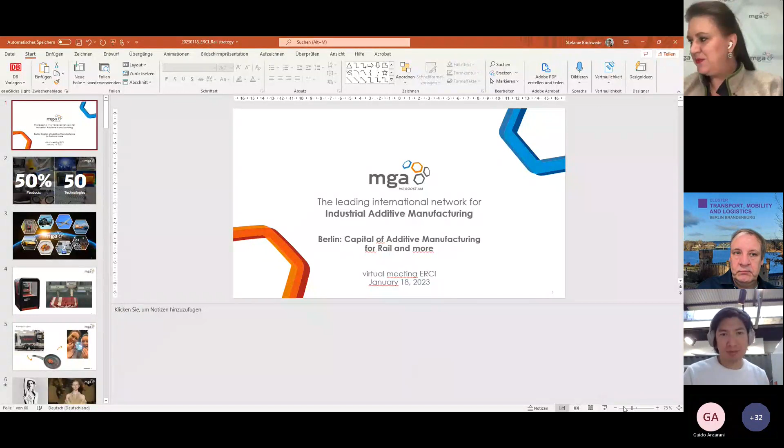Thank you so much, Lutz. Let me share my presentation. I'm really happy to be with you today because I think the potential of 3D printing in the railway sector is enormous. And I can say so because at Deutsche Bahn, we initiated our corporate project 7 years ago, and you will learn later how many parts we've already printed.

If you take a closer look at additive manufacturing, which is the expert expression for 3D printing, you will find out that by the year 2040, experts say that 50% of all parts worldwide will be printable. Anything you can think of, 50% of that will be printable. And already today, we have more than 50 different technologies in additive manufacturing, so this is not just one 3D printing technology, there are enormous amounts.

If you want to know which sectors already use additive manufacturing, you will find out that very soon, about 30 years ago, when this technology was established, the aviation industry started with additive manufacturing. Because after you've designed a digital twin, you can print out parts in a layer-by-layer structure—you add one layer after the other, which is why the whole technology is called additive technology. With that technology, you can produce totally differently compared to former technologies, and you can save a lot of weight, which is really interesting for aviation and aerospace.

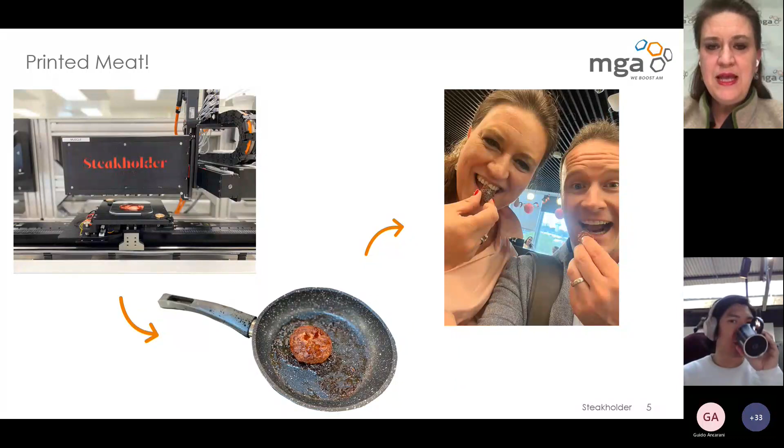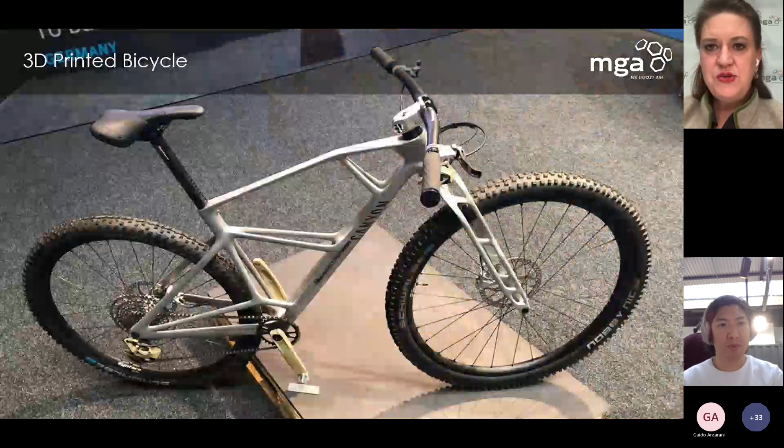In the fashion industries, AM is used with totally different designs. And also in the bike industry. And what you can also see here is that the design is different. So you can put material there where you really need this for reasons of strength, and the other parts you can just let away.

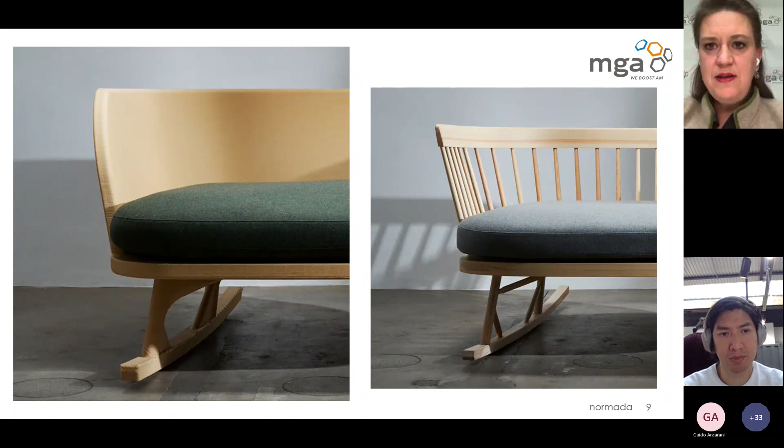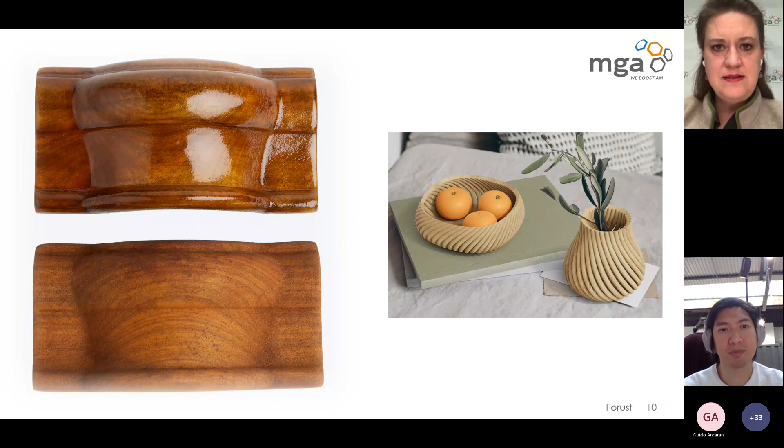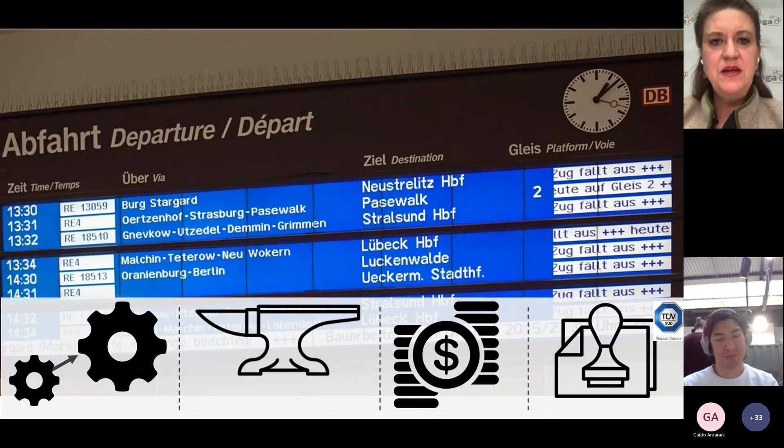Now we are coming to the sector where it's a lot of fun to work for: the rail industry. What is the rail industry using additive manufacturing for? In the rail industry, we need big parts. We need very strong parts. We have to save money with that. And of course, we have to fulfill a very high level of certification.

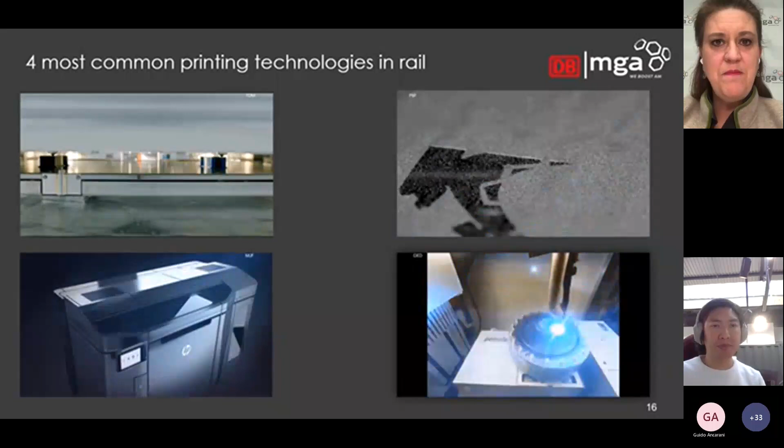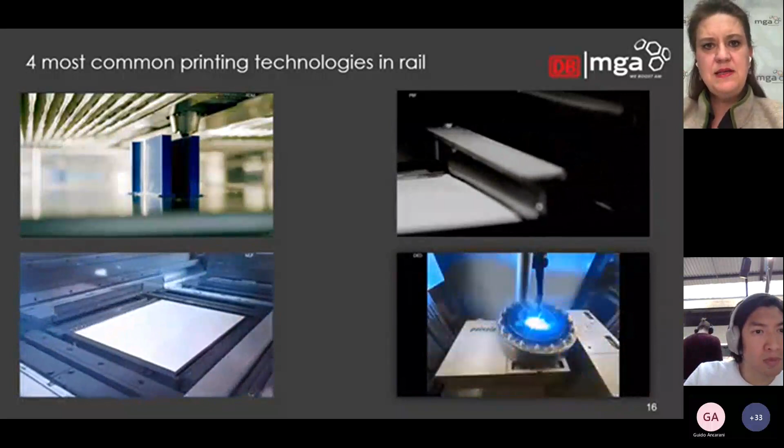If you ask me what are the main technologies we use in the rail industries, those you can see here. Starting with the upper left, that's the FDM technology, which is quite common, and I'm quite sure that all of you have seen that already. With that technology, you can use pellets or a plastic cable, and with the hot printer head, that material is heated up and in a layer by layer logic laid down on the build plate.

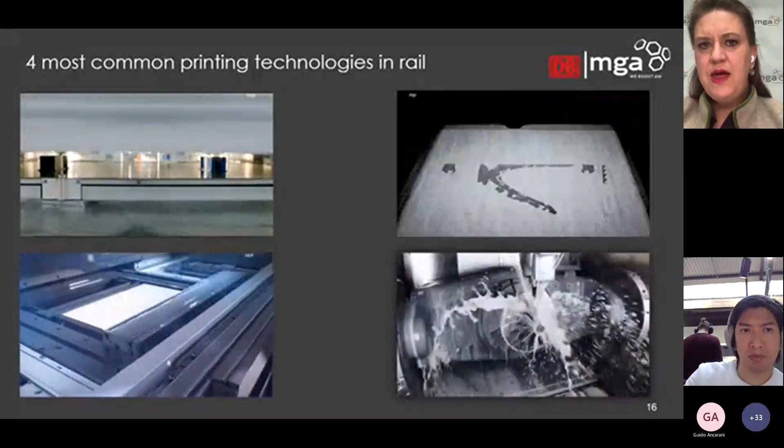On the upper right, you can see a powder bed logic, and this powder is very thin and it's melted with lasers. Those materials can be polymers or plastic in general, and it can also be metal. You produce a very strong part with that, but it takes a bit longer and therefore it's not very cheap.

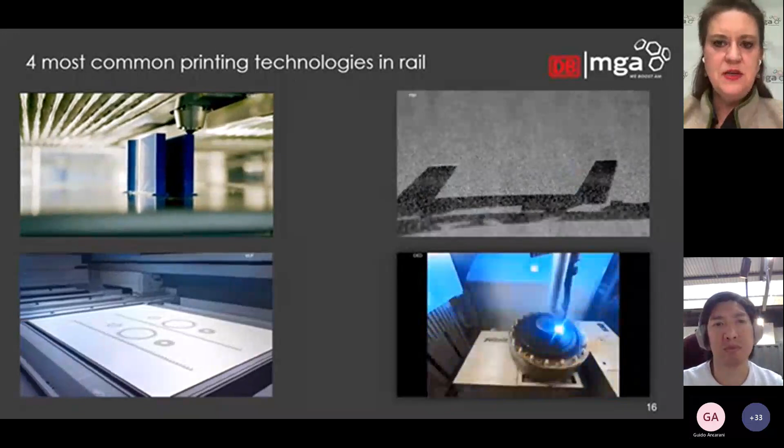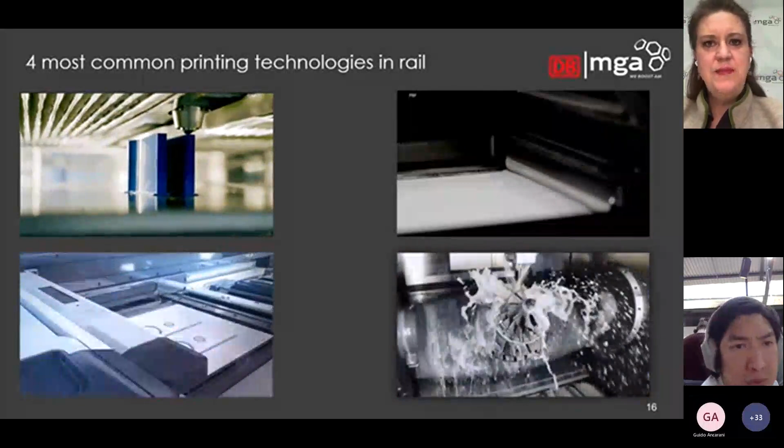On the bottom left, you can see a technology which was invented by HP, coming from the 2D printing logic. And there they use plastic, also with a high average of metal in that material. With that technology, you can produce either plastic parts or metal parts.

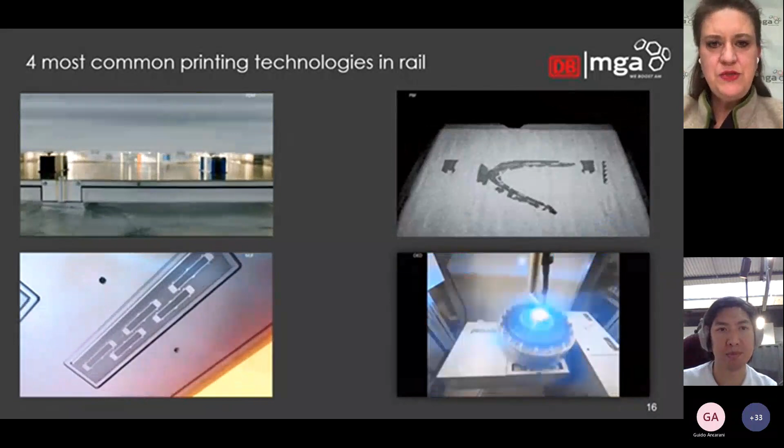And since we are in the rail sector, we need huge, big metal parts. The powder bed logic would be too expensive, and therefore another technology was invented, called wire arc additive manufacturing, where you have a metal cable that is melted by an electric arc.

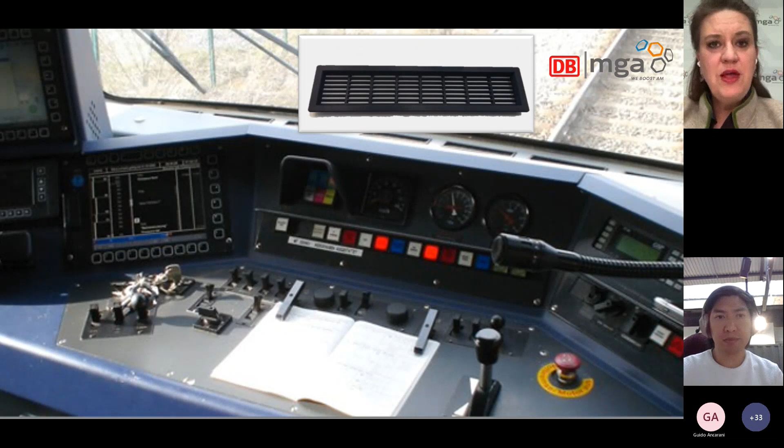What you can produce with those gorgeous technologies are spare parts. What you can see here is a little spare part belonging to the climate system of a train. Sometimes you can't get your hands on those parts anymore due to obsolescence, so meanwhile we print this at Deutsche Bahn. For that, we need FDM, the first presented technology, fused deposition modeling. With that technology, you can even produce parts with a very high level of flame retardancy.

Last year at Deutsche Bahn, we also discovered additive manufacturing for tooling. It's a bit funny because usually other companies start with tooling because those are low-hanging fruits and much easier if you take certification into account. But we discovered this last year, and what you can do are also quite big parts.

If you have to bring your trains in for a big overhaul every 6 years approximately, then you also have to color them again. Therefore, you have to put tape on these lights, and that takes a long time, and you produce a lot of waste afterwards. So what we've done is we've printed something which you can just put on these lights, spray around, take it off again, and use it at the other lights. Quite easy and quite cheap.

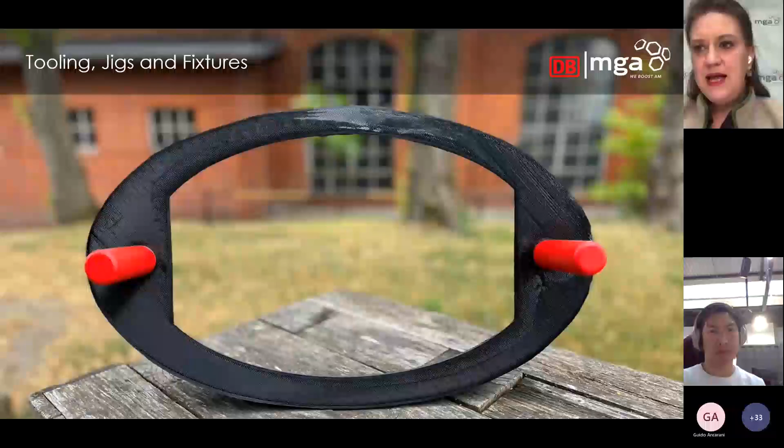In the rail sector, we are also dealing with a lot of customer aspects, of course. Therefore, we've printed braille signs for handicapped and blind people. With this additive manufacturing logic, which you can find now in half of the train stations in Germany already, we save half of the costs, because there you can produce differently. Before it was done with milling technology, so it's much cheaper.

We already also produce safety relevant parts. What you can see here is a secondary roll stop, which prevents a high-speed train from getting too much into the curves. Of course, that's definitely not only a mobility critical part, it is also a safety relevant part. And we printed that

nearly 2 years ago. In wire arc additive manufacturing, that is the logic where you can print big metal parts with a weight of more than 25 kilograms. And it has been running on the high-speed trains for more than 2 years. But if you print safety relevant parts, of course, you have to take a closer look at the quality. Therefore, we put that on a test stand and simulated another 30 years of operation, although we just need another 8 to 10. We are absolutely sure that part stands our high quality levels.

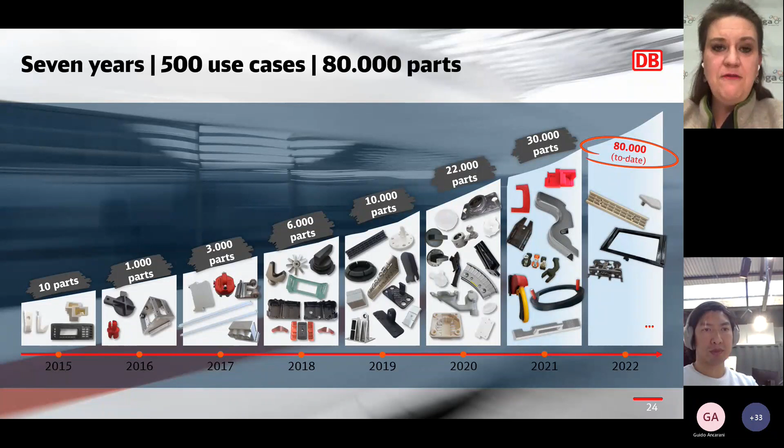At Deutsche Bahn, we've printed more than 80,000 parts in the last years, which means more than 500 different use cases. And we've saved a lot of money with that. Meanwhile, more than 10 million euros.

But it's not just Deutsche Bahn using additive manufacturing. It's also the Swedish colleagues. That is an Axle box cover, also printed in this metal technology. And that Axle box cover also has to suffer from big dynamic powers, and it also works.

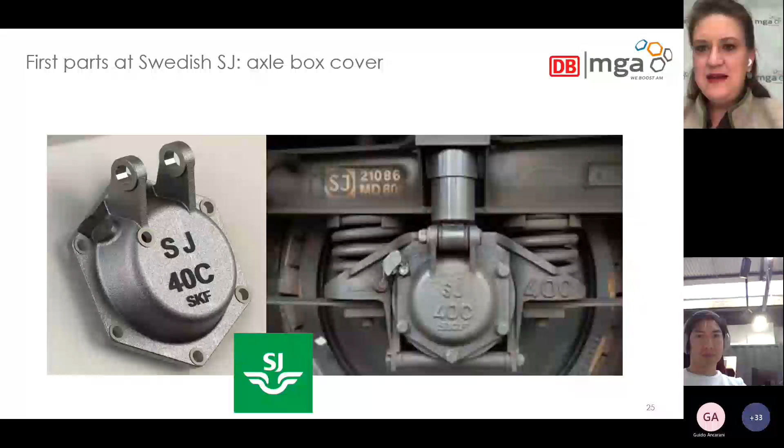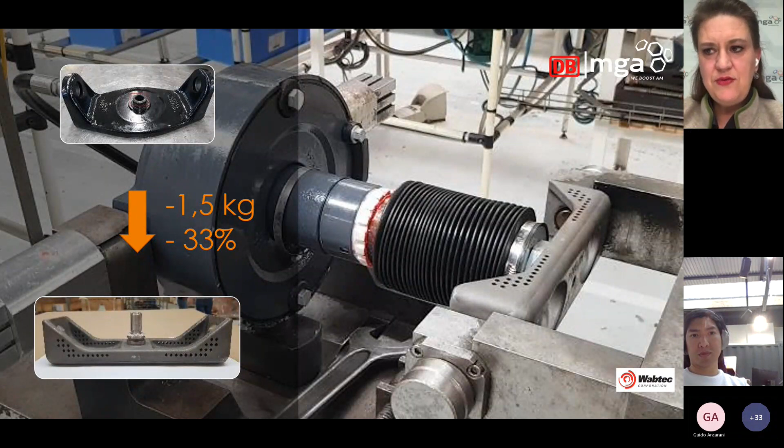The Dutch colleagues use it, for instance, for the housing of tablets. That's also a very common use case in rail in general. We also have that at Deutsche Bahn. And that is a part printed by Wabtec. Wabtec is also one of the suppliers which uses additive manufacturing in a wide range of different use cases, now also working together with SKF and also Alstom and other rail operators like SNCF. So they are very experienced in that too.

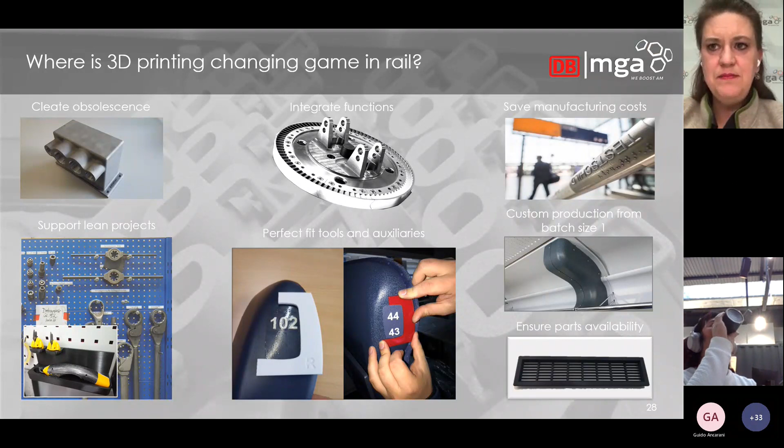What do you use additive manufacturing for in the railway sector? That is for clearing obsolescence problems. You can integrate functions, you can save manufacturing costs, and you can, and that is one of the big advantages, use it for very small lot sizes. So you do not have any minimum order quantities anymore. You can ensure your part availability and do also really interesting jigs and fixtures and auxiliaries, which you can see here in the middle. We also use it for lean projects like shadow board holders, which you can see here.

The rail industry in general, and I can say so because we're in a very close context with 6 other European railway companies, so we cover the big majority of the European rail market, everyone is looking for different technologies and especially materials, so they do scouting in that. Everyone is also thinking about in-house production, but everyone also says that they will also stick to printing service bureaus because you cannot cover the whole range of potential parts in-house. You need internal specialists, so you also need to train those colleagues and give them information at hand, what they can do and also what they can't do. Of course, you always need digitalized parts.

And that is also one of the big challenges in the rail industry, especially as an operator, because usually you do not have the sufficient drawings, and therefore you have to digitize your parts before. This is why most of the European railway companies also do scanning days where they go into their maintenance sites and scan a lot of parts, so they have the digitized designs on their digital warehouse afterwards. And that means we can also overcome problems in the digital supply chain, and produce small batch sizes and establish a stronger presence.

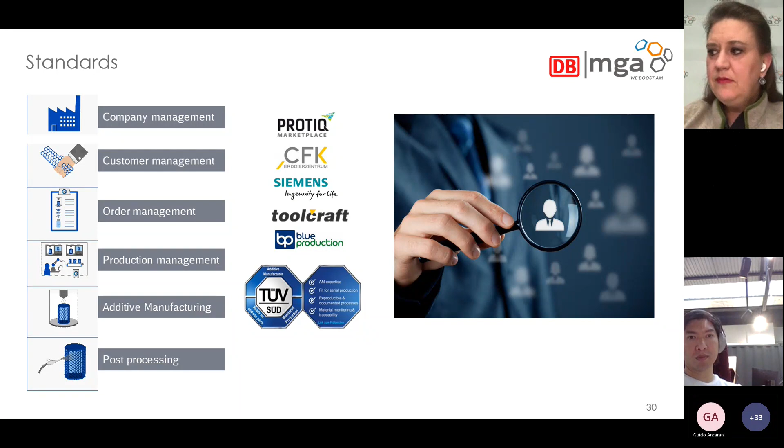We all learned that we have to suffer a lot of crises, different types of environmental problems, like viruses, closed harbors, and meanwhile also wars. And therefore, we all have to think about how we can cover the supply chain, even if that might be interrupted by different occasions.

And we also have to think about sustainability. And additive manufacturing is the most sustainable technology. Why is that so? Because you can produce lighter parts. That is, as I already mentioned, crucial to rail, and especially in the aviation and aerospace industry.

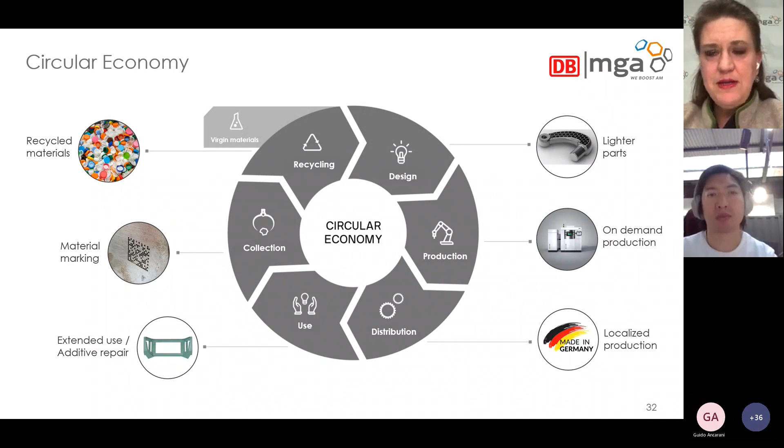You can print on demand, so you do not have to put things in a warehouse anymore. You can print them when you need them. You can produce much more locally, so you don't have to transport parts all over the world. You can extend your use, so there's no natural end of a life cycle anymore because you can reproduce parts. And you can even do material marking and use recycled materials. That has to improve even more in the AM industry, but this is already on the way.

We've done an analysis with these optimized designs I've already spoken about. What you can see here is a cargo hinge for one of our cargo trains, and we've optimized that. Afterwards, we compared different technologies like casting, milling, and printing. And what you can see is that you can save a lot of weight, which also means you can save a lot of production waste and a lot of material.

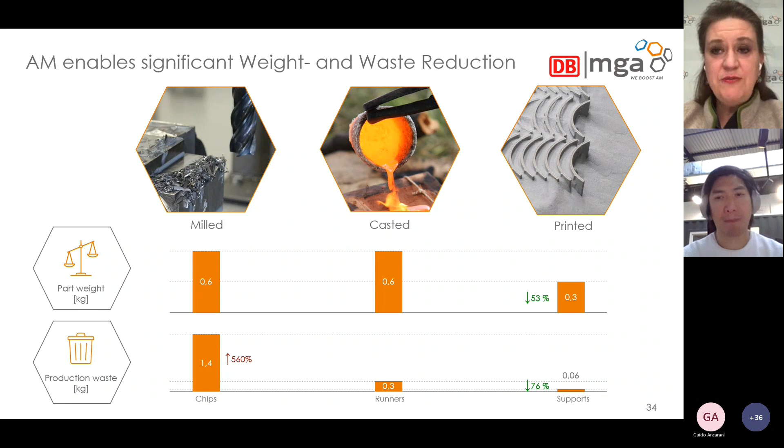And that is also crucial at the moment, because you all know that we can't get those materials anymore in the numbers like in the past, because many material suppliers are in China and in Russia, and it's a no-brainer that we have to think this newly.

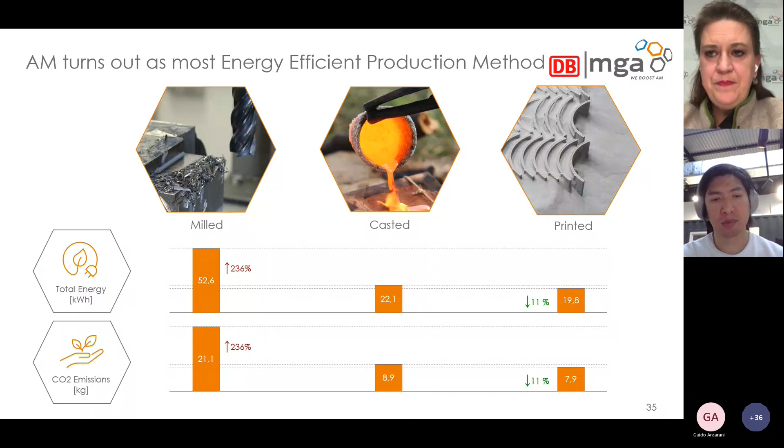You can save energy, and you can also save CO2 emissions with additive manufacturing. It always depends on the specific part, of course, but what you can see here are analyzed numbers, data and figures. So we know that that is possible. This is why Deutsche Bahn considers additive manufacturing as being a green technology.

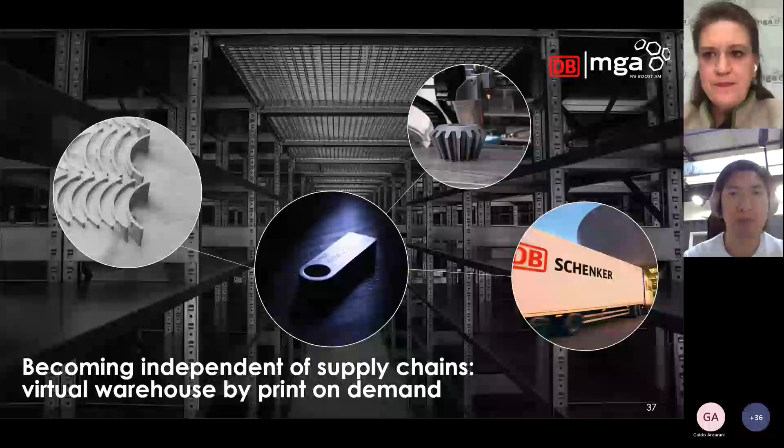And what was also decided is that our DB Schenker daughter started with additive manufacturing in the logic that you can empty your physical warehouses through a print-on-demand logic. We know now that we could already today print 10% of our parts, which for Deutsche Bahn in the rolling stock area means more than 10,000 different use cases.

And that is our strategy. We want to print them until 2030. Of course, there we also have to put some hurdles out of the way, but I'm absolutely sure that we are going to make that.

We know already today that 30% of our slowly moving parts can be printed. And that is exactly what we are doing now at the moment. We're considering how to print them and to save a lot of money, because if you put something in the warehouse, that is capital you cannot use for anything else anymore.

We are busy with scouting different materials like flame-retardant polymers. You already have solutions for that, but there should be more. Elastomers for different use cases. Sand molds is really attractive, because with printing sand molds, you are still in the traditional technology, but you're much faster in the production process. Printing copper is really interesting, aluminium, of course, and even concrete.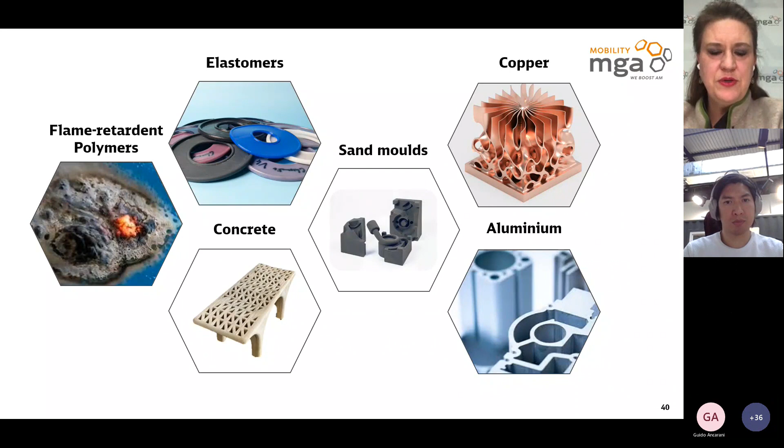What you can see here is one of our station benches. Those are the technologies for printing elastomers and also concrete. And even in the concrete sector, there are already different technologies on the way.

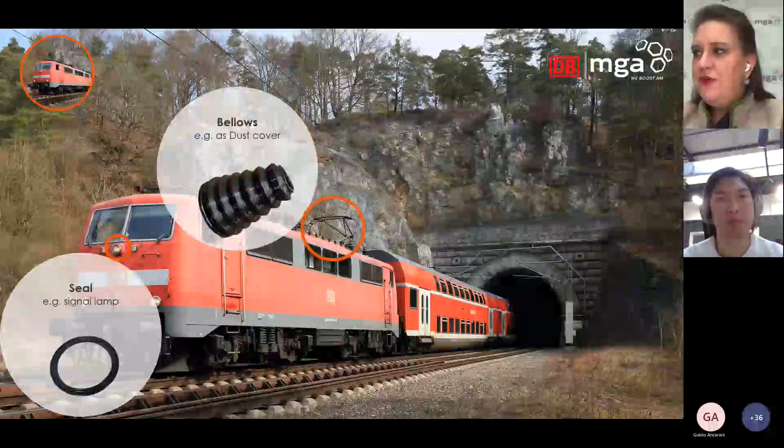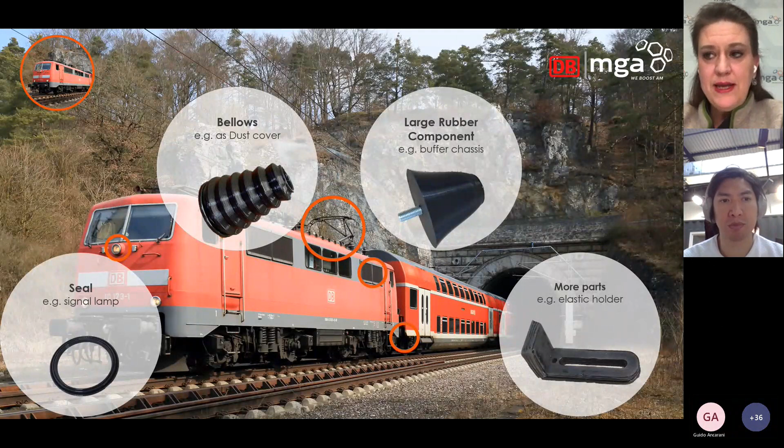Printing elastomers might be interesting for seals, for bellows, for large rubber components, for elastic holders, and whatever you can think of. And if you want to put them on a warehouse, you cannot do this endlessly, because you have to throw them away after 6 to 7 years.

Printed benches, you've already seen one, is one of our latest projects. And you can also here again do different designs.

What are the next big things ahead? Liquid metal printing is also interesting, because it's a very cheap and inexpensive technology for metal parts like housings.

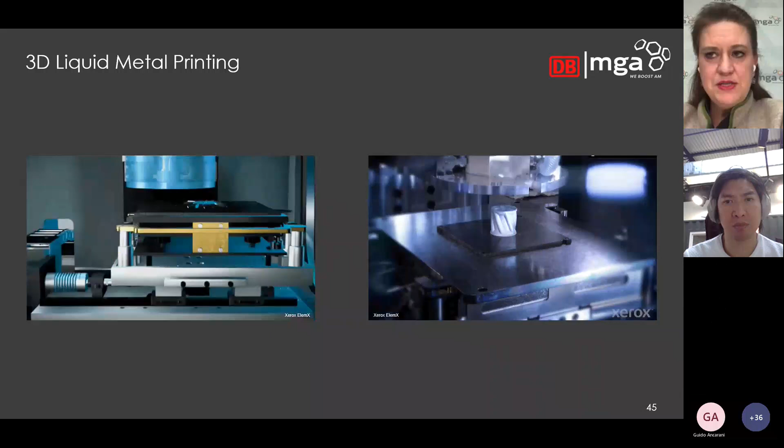Micro printing - so everyone's looking for electronic spare parts, and there's a promising Israeli company called Nanodimension who's busy with that. But that will take, unfortunately, another 3 to 4 years.

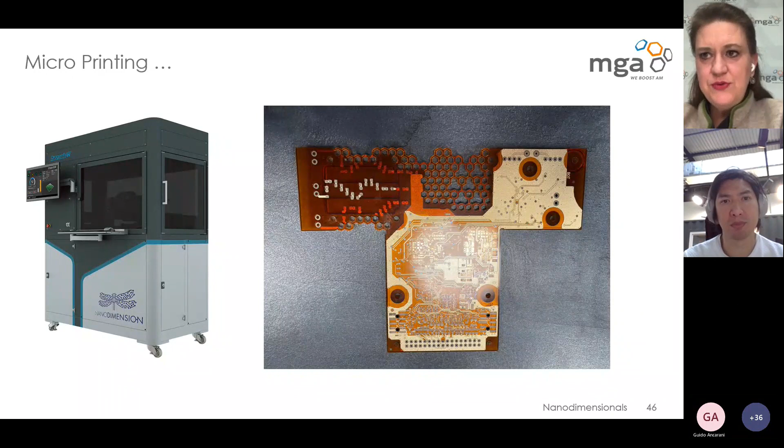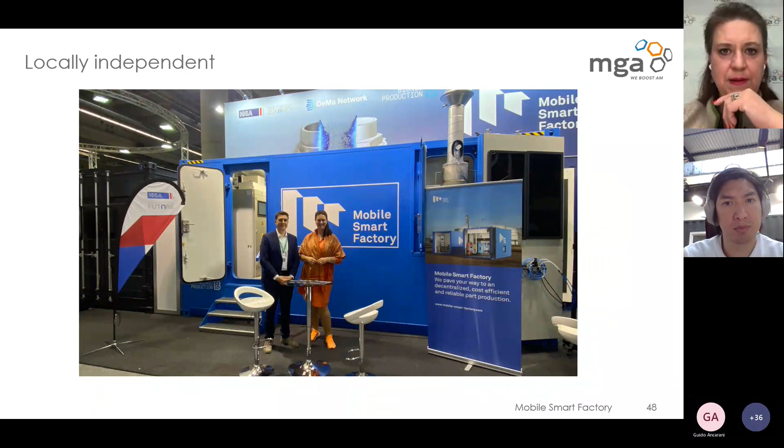So with that technology, you can produce very big things, and they are very tough and strong. You can print in containers, locally independent. This is, by the way, also interesting for everyone who's doing maintenance, also in the defense sector.

And you might be a bit confused by now about all those different technologies. And if you would like to learn more and share your knowledge and get some knowledge, this is why we founded MGA. Within MGA, you find a lot of users from different sectors.

You will find printing service bureaus. You don't have to buy a printer right away - you can also try things out. A lot of universities and machine producers, as well as consultancies and bodies you would need, and of course software companies, as well as material providers.

So within MGA, you will find approximately 150 companies throughout the whole additive manufacturing field. We work in working groups in 2 different fields, which is mobility.

And there you can also find a working group, which is called approval in rail, that deals with rail tasks, as well as rail liability, where all those rail operating companies come together.

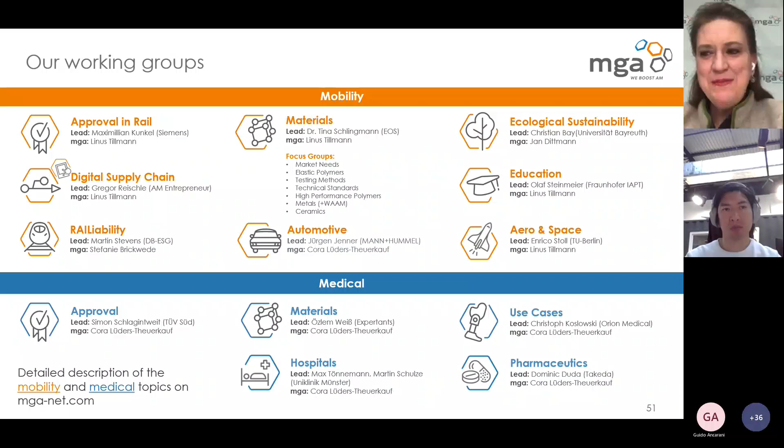You will find materials working groups and working groups from different sectors like automotive, aerospace, and so on. And 4 years ago, we founded a medical sector, which has nothing to do with the rail sector, but still is really interesting. They are dealing with the same challenges as the rail colleagues do, so it's also interesting to get into an exchange.

If you would like to get more different use cases and you would like to get informed which materials are printable, that's mga-net.com with a lot of information. And you can also visit us in Berlin.

Warm welcome already, where we have a huge exhibition of printed parts from different sectors. And this is where you can find us in the south of Berlin, with our industrial additive manufacturing hub.

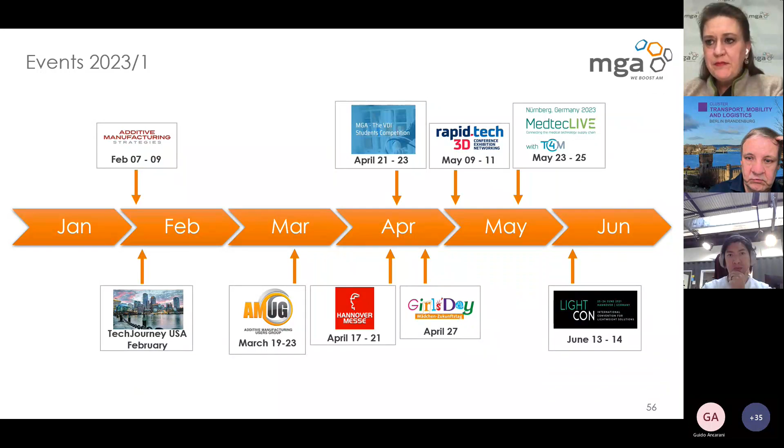And we're doing a lot of events, like a tech journey beginning of February to the United States. We are also at different formats like Hanover Fair, or we're doing a cooperation for a 3D printing students competition, and a format which is called LightCon for lightweight solutions.

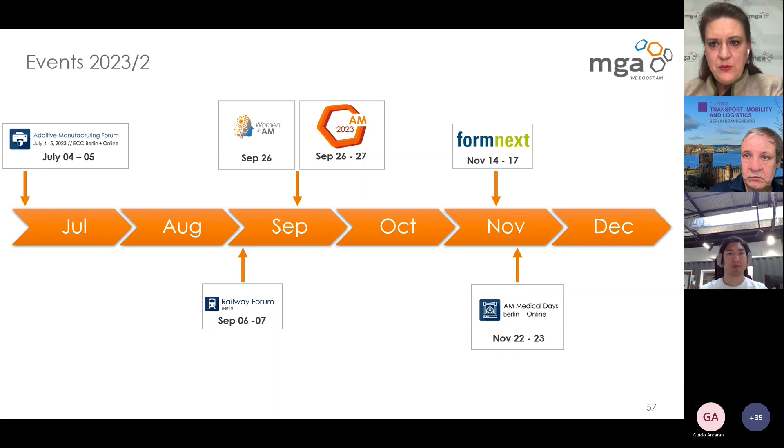And we have a huge conference in Berlin about additive manufacturing with approximately 2,000 participants. That's the Additive Manufacturing Forum taking place in July. And of course, our own annual meeting within the network in September. You will find us on the Railway Forum, which takes place in Berlin in September too.

And I've already mentioned our annual meeting - this is where it took place last year. And you're more than welcome to join our great network. Thank you very much for your attention.

Yeah, Stephanie, thank you very much for the very impressive presentation. I'm waiting to receive 3D printed food in the ICE board restaurant, and maybe that is the future, or a part of the future.

You also mentioned the different occasions where you are present for sure. And as I mentioned, ERCI also is planning to have several possibilities at trade fair shows - for instance, at SIFER in Lille, in Krakow, in Gdansk, and also I have in mind that there is a railway interchange fair in Indianapolis in the beginning of October, and for sure you are all so welcome to join us there.

So I have some questions on the desk, and the first one is about your network. You mentioned huge companies which are members of your network. How many women are in your network? Is there an existing Women in 3D Printing initiative?

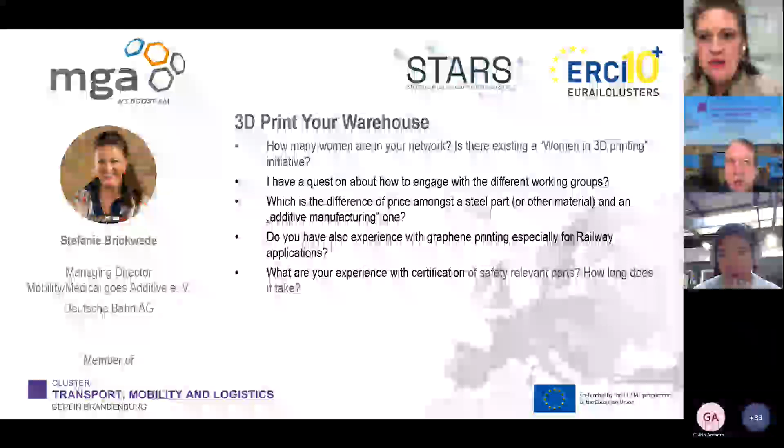The next question: do you also have experience with graphene printing, especially for railway applications? What is graphene? Can anyone help me? It's a 2D material, extracted from coal. Okay, graphite. I think it's more like carbon. Yes, carbon materials, exactly.

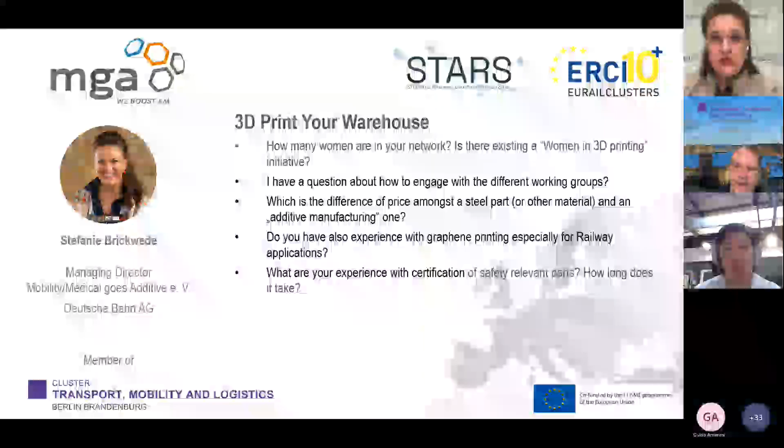Carbon is also used in the additive manufacturing sector, where you bring carbon into plastic materials, which makes them a lot stronger. We use that for tooling. We do not use that in trains at the moment. So this is maybe one of the new fields, but no matter what technology, it's a very expensive material as far as I know. So maybe that's one of the future fields, but not for now.

Yeah, one of our participants sent a Wikipedia link into the chat on the graphene material, and there is a last question. What is your experience with certification of safety relevant parts? How long does it take? Is it complicated or not?

And I think that is a big topic anytime. If you produce safety relevant parts, for sure you have to authorize them. Of course. So at the moment, if we want to replace existing spare parts, we have to prove that form, fit, and function is nearly the same. So as I showed with our secondary roll stop as well as an axle box cover, we put them on test stands and we do a lot of material improvements.

And that takes time. It depends how fast the colleagues are and how urgent the use case is. So if we have a standstill of trains, they are usually a bit faster than in other cases. But you're absolutely right. It takes a lot of time. It's time consuming. It depends how safety relevant and critical the part is. It's between a couple of weeks up to a lot of months.

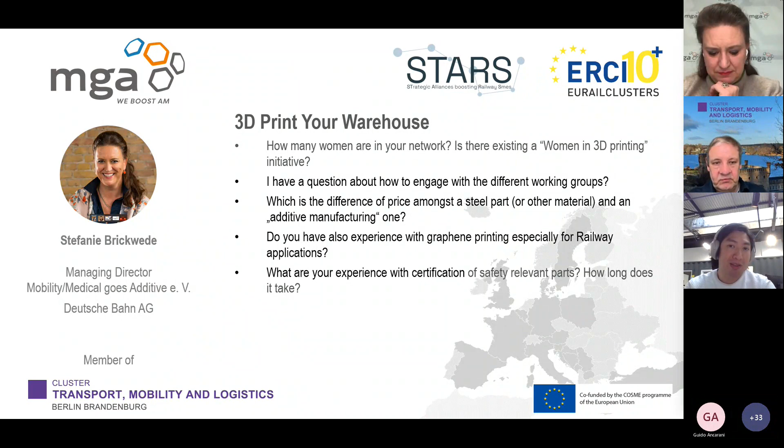So from the moment that they finish a design until the moment that they receive the part back in their hands is their lead time. And they really want to minimize that as much as possible, because during that time, there's basically a dead time that they're not able to work. So the faster they're able to get parts back into their hands, the faster they're able to iterate their designs, test it, validate it, and get a product either launched into space or on the market.

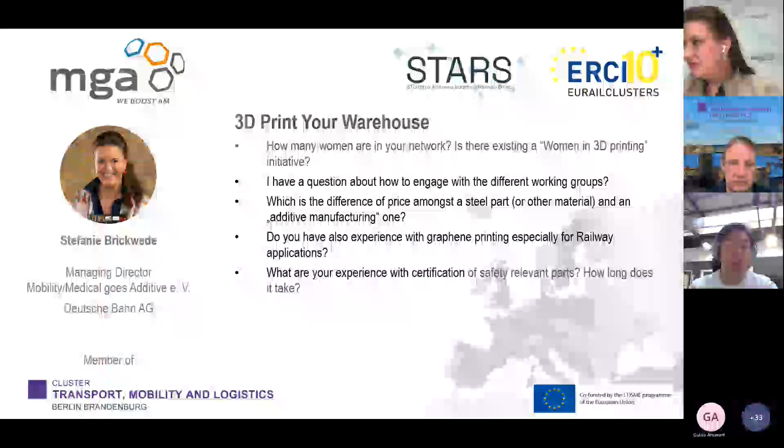And that comes at an opportunity cost, and it's a little bit difficult to calculate that sometimes because it's very specific to each company what that opportunity cost is. And the other cost is something that I think Deutsche Bahn and Mobility Goes Additive know very well. It's the total cost of ownership.

We were talking about digital inventories, and when we did a project once, we started working with a medical company, and we realized that their way of traditionally manufacturing these spinal cages for implants was either through injection molding or through CNC milling. But they had a lot of different designs, slight variations of every design.

But if they wanted to have the solution be readily available to a particular patient, they would need to manufacture all of them and keep them in inventory. And there's a very large associated cost with that, because every part needs to be milled or machined, and it requires setup costs. And then you have to store all this in your inventory.

And when you're talking about, say, high-performance polymers or medical grade, implantable grade materials, this becomes very expensive. So there's a very high associated cost of ownership for having a solution in your inventory. So once you get rid of your inventory and you have a digital inventory and you just have the raw material and you can print it on demand, this greatly reduces your cost. So I think that's something that I would like to add to Stephanie's response there in terms of the cost of 3D printing compared to traditional manufacturing.

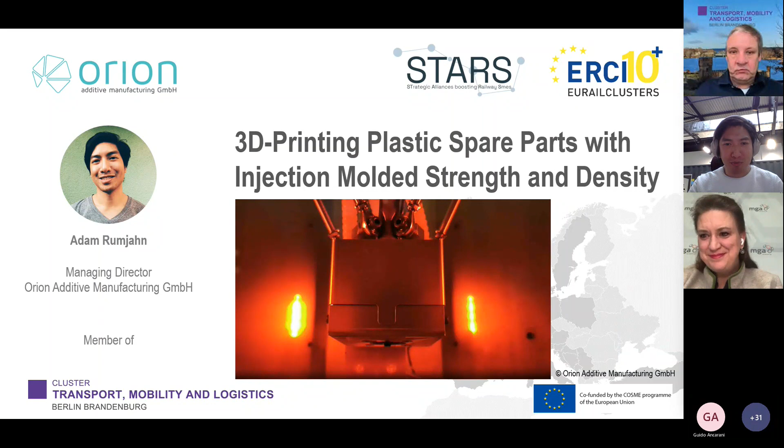Thank you very much. So, I'm really, really grateful to have the opportunity to present here today. And some of you may not know us, but we're also a part of the Mobility Goes Additive and Medical Goes Additive network. So Stephanie and I know each other well, and we're really happy to be here co-presenting together. So I'll start my presentation.

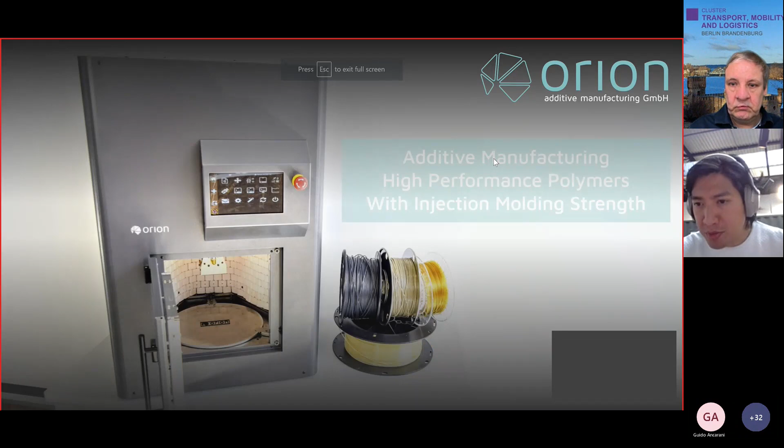Yeah, perfect. So for those of you who are hearing about us for the first time, we are Orion Additive Manufacturing, and what we focus on is development of additive manufacturing solutions for high-performance polymers. And what we're able to do is we're able to print these polymers with basically injection molded strength. So when we speak about high-performance polymers, these are usually thermoplastics that are kind of at the top of the pyramid, that are used in these really advanced applications, whether they're in space or they're for medical implants, but they have really high strength, so some of the strongest plastics in the world.

And they could also be used in places where there's a need for high temperature resistance or high chemical resistance. So some of these polymers are listed here below, but one of the more popular ones is PEEK, or the family of PAEK, polyaryletherketone, which comes with other polymers like PEKK or PEK as well. So, the challenge in printing with these polymers is basically that, as Stephanie mentioned earlier, we're always printing them one layer at a time, so stacking one layer over another.

And in a lot of processes in this kind of FDM layered manufacturing process, the layers don't bond really well together. So it makes it a little bit weaker. And this weakness in the interlayer bonding basically causes it to fail prematurely or to delaminate, or it may not be as strong as what you would expect in, say, traditional manufacturing, such as CNC machining or injection molding. So this can have an impact on the final application, because it depends if it's a structural part or if it needs to be used for its full strength or for its full capabilities.

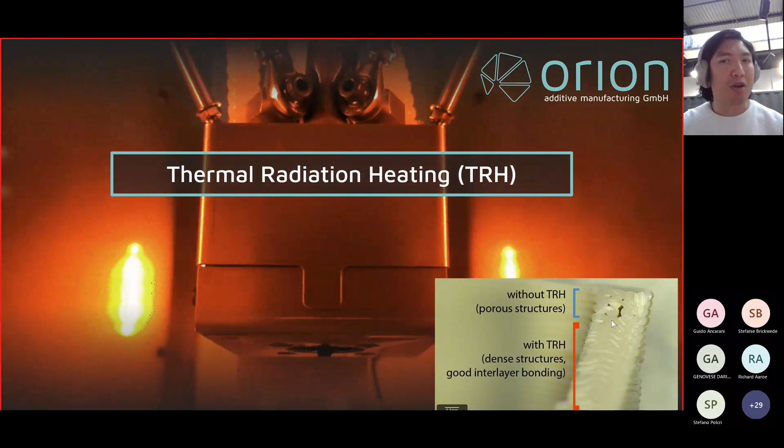And not only is this a 3D printed part, but this is also oriented in the weakest direction that you would normally expect a 3D printed part to behave. And the final outcome was actually that we achieved a tensile strength that is actually higher than injection molding, which was actually beyond our expectations. So when we first started this project, we thought we were going to get very close to injection molding, as close as possible.

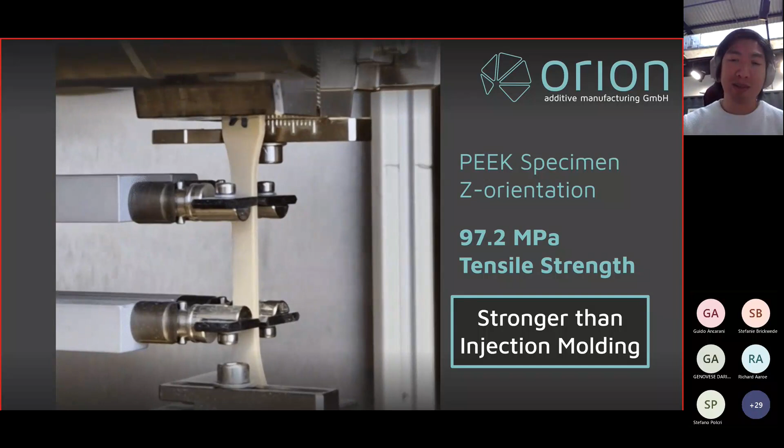That was our goal. But what we actually ended up achieving is getting stronger than injection molding. So the next slide here actually shows all of the data.

PEEK is one of the materials that we work with quite a lot, and there are 3 main PEEK suppliers in the world. Solvay is based out of Belgium, Evonik is based out of Germany, and Victrex is based out of the UK. So we have their materials here. We actually worked closely together with all the material suppliers to test the materials. We print them, we send them back the samples, and they test them in their own labs to make sure that it's validated using their own testing processes, and there's no biases there.

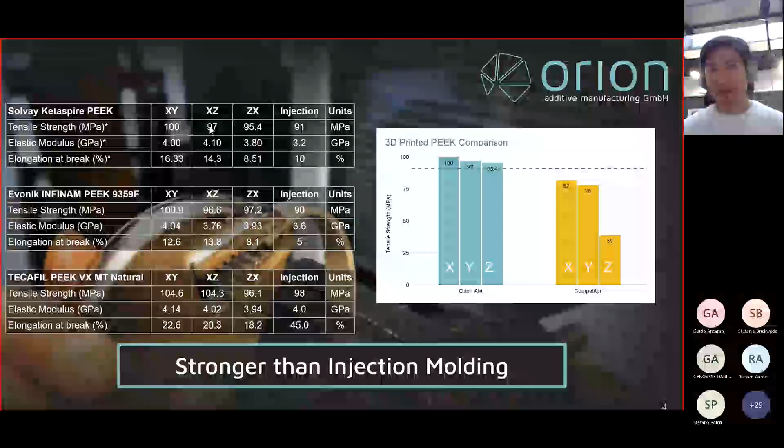So all across the board, in the flat orientation, which is fairly standard, it's already 10% higher than injection molding. This is kind of the on-edge orientation, it's still higher. And then on the vertical direction, this is basically pulling all the layers apart, it's the worst, weakest orientation. And even in that orientation, we're higher than injection molding. So you can see this line here represents the injection molded strength, and all these bars here represent the different orientations, including Z, which is the weakest direction.

So on the right here, you see a benchmark with our competitors and how the strength differentiates using the Orion Additive Manufacturing process.

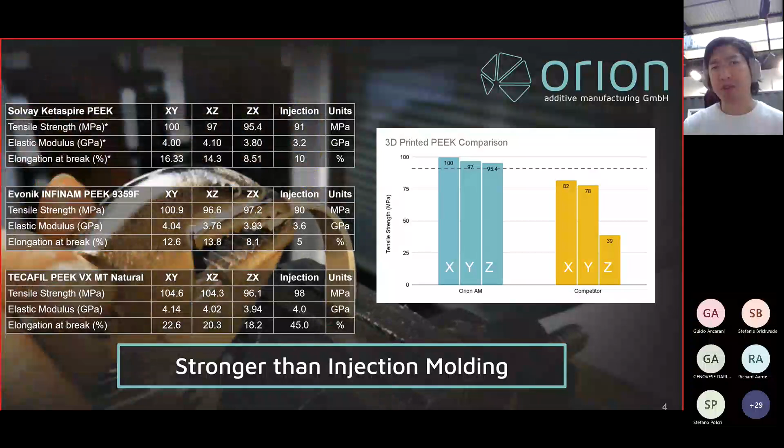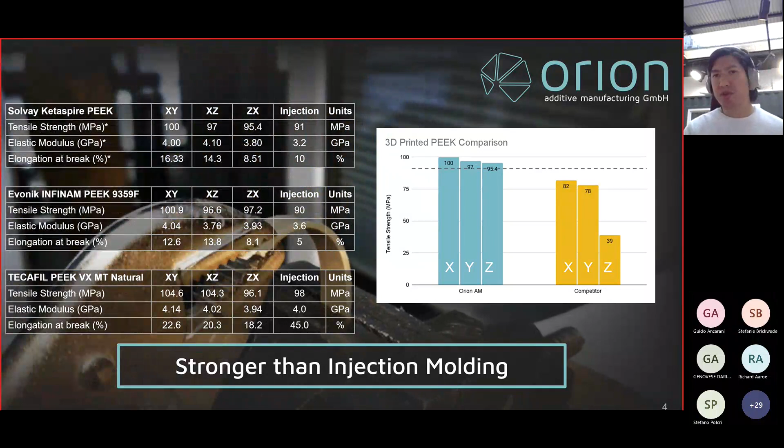So what this really means for us is that you no longer have to make compromises when it comes to additive manufacturing, especially with high-performance polymers. You don't have to think about what is the weakest link, because normally you would take your weakest orientation and say that is the maximum strength you can get out of this part. And then when it comes to certifying these parts or rolling them out into an end-use application, you have to take that into consideration. So it's a highly compromised part in that sense. But in our case, with our process at Orion Additive Manufacturing, you don't have any compromises. So you can take a part that you used in an injection molding process or CNC machining process, and you can 3D print it without having any compromises at all.

So we've focused on a lot of different applications, but one area we focus a lot on is space applications, and we've worked with the European Space Agency to validate our process with a special material that they came up with. This material is based on PEEK, polyether ether ketone, the strongest plastic in the world. And they added carbon nanotubes and graphene platelets to this material to create a conductive material for space applications specifically.

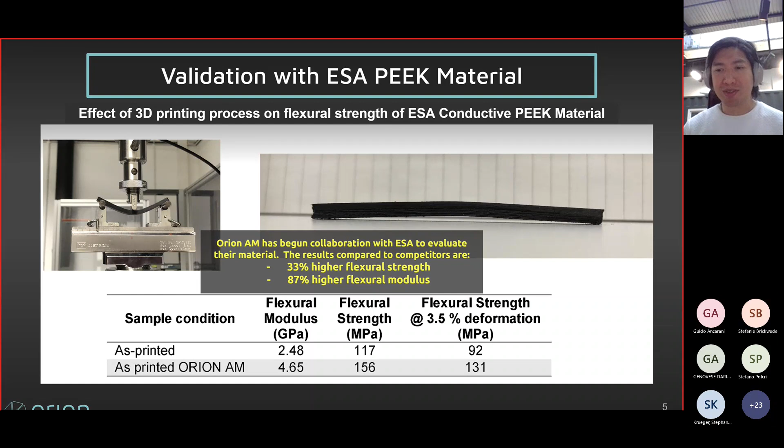They've been going through a lot of validation of this material, but they wanted to see what we could do with our process to improve the mechanical properties. The as-printed sample was with one of our competitors' technologies, and as printed with Orion using our technology, we were able to increase the flexural strength by 33%, and the flexural modulus, or stiffness, by up to 87%. This was really great validation for us and for ESA, showing what's capable using this material with our process, and it opens doors for more opportunities in space applications.

A little bit more on that later.

The other part of it is that our process is able to achieve really high density. So whether it's for implant applications, railway applications, or space applications, this density has a major impact on the structural integrity of the part. Especially in space, if you have internal porosities or voids, this can be quite problematic because of off-gassing. If you have air or gas trapped inside, once you launch it into space, if this gas leaks out it can be very problematic to scientific instruments or sensors, where the gas comes out of the material and accumulates onto these instruments. So we're able to prove that we actually have a void content of less than 0.05%, which is basically on par with injection molding and CNC machining, making it useful for validating our process in comparison to these other traditional manufacturing methods.

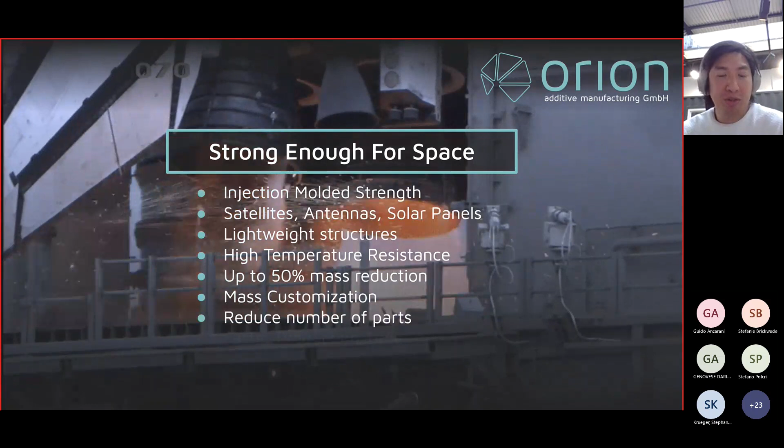So it's strong enough for space. It has injection molded strength, and there are many different applications you can use it for. As Stephanie also mentioned, one of the main benefits of 3D printing is mass reduction. And in some cases, some of these materials are actually typically used to replace metal parts.

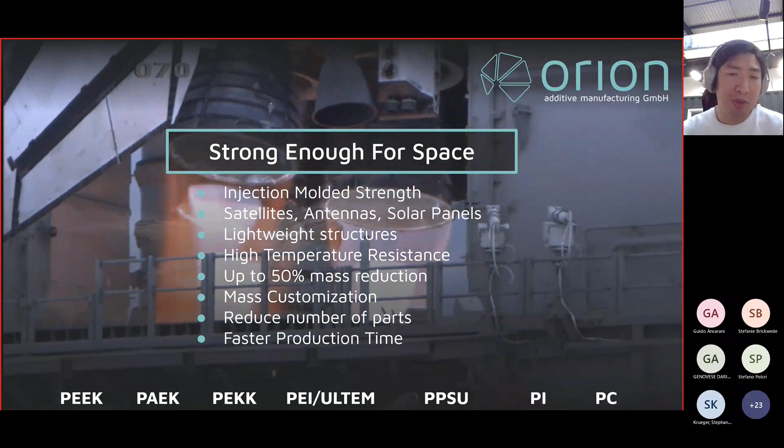Because they perform as well as, if not better than, some metal parts such as aluminum. So PEEK, for example, is very chemical resistant. It has a really similar strength-to-weight ratio as aluminum, but it's half the density, so that means half the mass. You can use it to replace metals in cases where you're concerned about corrosion. For example, fuel line brackets in the aviation and aerospace industry are sometimes replaced with PEEK because they don't suffer from corrosion like aluminum brackets do.

And there are other clear benefits as well, such as the ability to add more complexity, reduce the number of parts, integrate a lot of features into a single printed part, and take advantage of faster production time.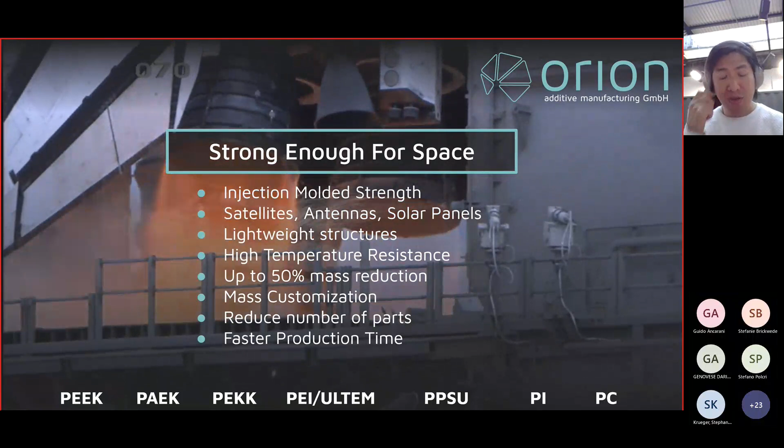So I want to show you a couple of space applications that we've worked on, just to get some ideas also in terms of what could be possible in the rail industry.

What was interesting about this application is that we started with a CubeSat frame, and the end user didn't really have a lot of experience. They wanted to understand more about 3D printing and see if we could achieve some of the specifications that were required. We proved that we were able to meet the requirements for this particular application, and it got them really excited. So they started getting more and more ideas once we started working together, and started thinking, okay, can we also print these internal components inside?

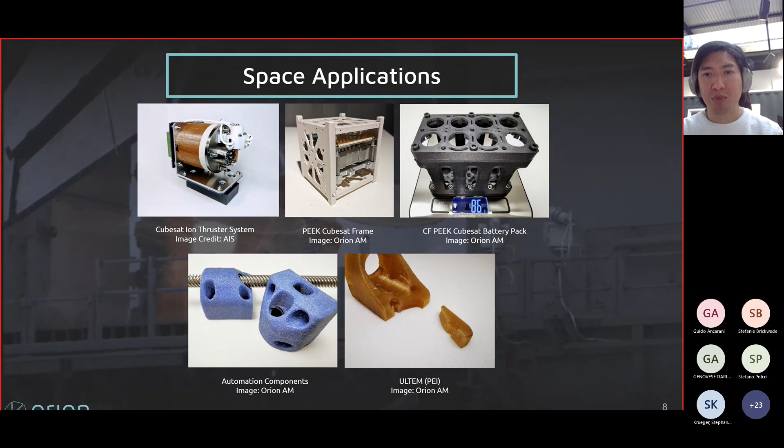It was a real privilege and honor to work with the European Space Agency on this, but this really proved to them our technology was able to perform as good as injection molding. This is why they chose our technology to produce these parts to go to the moon, because they knew there weren't going to be any compromises in the material properties. You can get all of the material properties out of the printing process.

So we aim for the moon, but I think that shows if it's good enough to go out into space and be on the moon, it's also good enough to be on a train in the railway industry or in other applications as well.

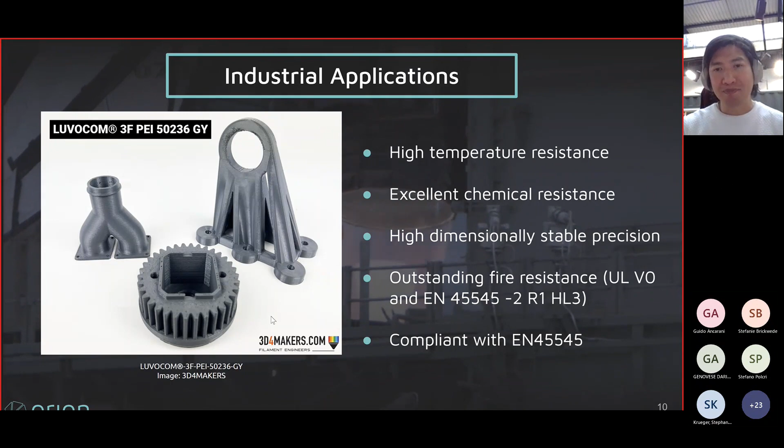So that's something we wanted to highlight. Looking at our company, we are a fairly young startup. We started in 2018, and we developed this technology which has a lot of potential, and we're kind of looking at where we want to go next.

In terms of lightweighting, especially for the aerospace industry, composites is kind of where you want to go. So we've been examining this, and last year we took the opportunity to evaluate our thermal radiation heating process to see how much we can improve the process of printing with composites.

On the market today, there are a few printers, such as Anisoprint or 9T Labs or Markforged, probably one of the better known ones. But these printing processes don't really consolidate all of the fiber reinforcement content well, and the fibers can still delaminate from each other. This has some compromises in terms of mechanical properties, so you can't get the most out of it. Also, some of these materials aren't suitable for particular applications, such as in space, because the Markforged material, for example, is infused or impregnated with polyamide, which is not usable in a space environment.

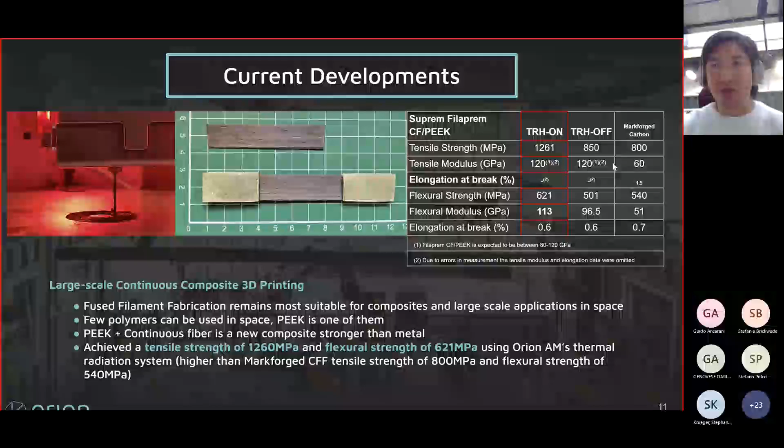So we wanted to see if we took PEEK and continuous carbon fiber and applied our thermal radiation process, could we also improve the mechanical properties? Our studies started looking at what would happen if we didn't use it and what would happen if we did use it.

So you can see a clear difference here in the tensile strength. When we didn't use thermal radiation heating, we got 850 megapascals, which is really similar to Markforged. But when we did use thermal radiation heating, we increased it by almost over 400 megapascals, so 1,260 megapascals tensile strength.

Another significant improvement is also the flexural modulus, which is the stiffness and bending. Compared to Markforged, we're more than double the stiffness in this material just by using thermal radiation heating in our process.

I think this really changes how we think about additive manufacturing, because we typically think that with printing parts there are some compromises, and also when it comes to composites, it may not ever be as good as traditional composite manufacturing. But I think looking at how we can apply our process to improve this, we can now start looking at creating solutions where there are no compromises.

But of course, this is still something that we have in development, and we hope to share more news about our developments in composite additive manufacturing in the near future.

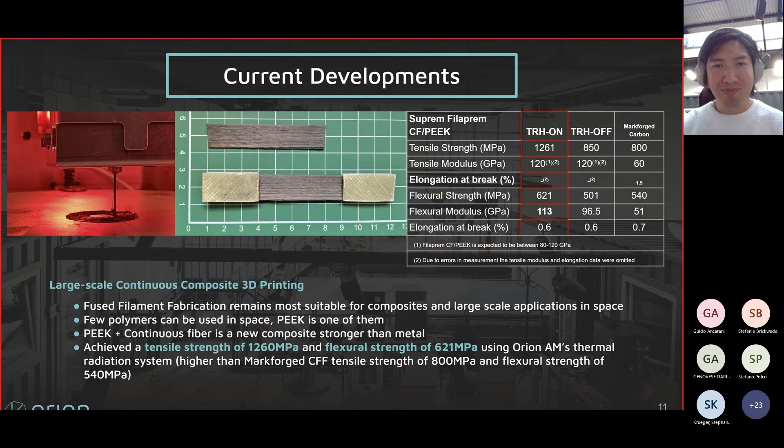One of the things that were brought up were also in terms of certification. We also learned, actually in the last MGA annual meeting, we saw a couple of presentations about how parts are made and certified for the railway industry. When it comes to structural parts, it takes a very long time because you have to make 5 parts and destroy 4 of them. So there's a lot of destructive testing, a lot of shock. Just like in the space industry as well, they do shock and vibration testing.

I think what we've managed to do in our process is show that we can consistently achieve high strength that is as good as, if not higher than, injection molding. And I think if we can continue to prove that, it'll be easier for us to certify parts directly out of the printer, so that we know our process is stable and able to consistently achieve these mechanical properties.

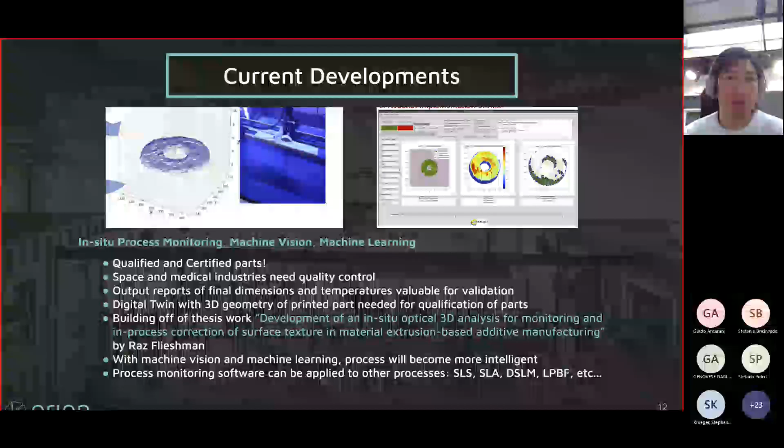But the other part of it is also just understanding, did our process introduce any sort of errors, gaps, or voids into the final product, and are the dimensions within the correct tolerances that we're expecting? So this is something we're also rolling into our developments, is how do we monitor this process in situ, so that we can either correct it on the fly with in-situ process monitoring, or at least have a warning that we did not meet our target dimensions.

Because I think at the end of the day, all of these processes with additive manufacturing are really great, and they show a lot of promise. But the ultimate goal is to be able to take a part directly out of your 3D printer and have it qualified or certified, knowing that it's going to behave as good as an injection molded part, or a part that was designed by an engineer.

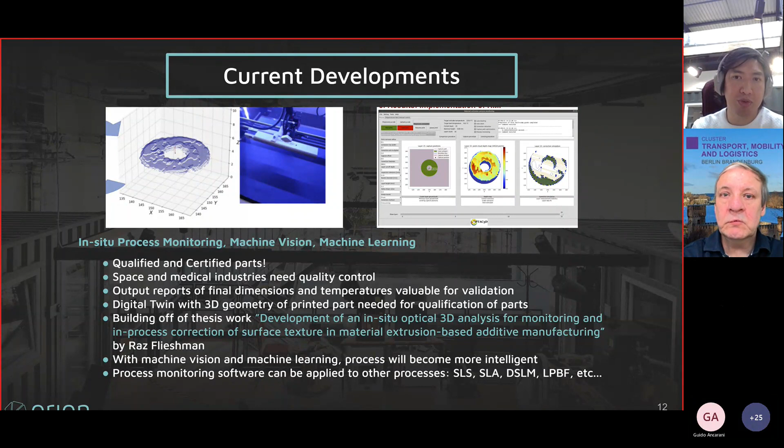And what's interesting is, I think with additive manufacturing we have the ability to do that, but it's all about taking pieces from other technologies and adapting them to ours, making sure we make the right integrations of the advanced technologies available to us today to create such a solution. So this is kind of where we see additive manufacturing going, to be able to do quality control directly inside of the printing process so that we get finished parts coming right out of our printer.

So I didn't touch so much on the implants because this presentation focused a little bit more on the industrial applications and railway industry, but I just thought I'd take a short moment to share with you some of the things that are possible in terms of the medical industry.

We work with this PEEK material, which is also a biocompatible material, and it's typically used to replace titanium. I think it's kind of interesting to explain to the audience that this material is very strong, and it is used to replace metals.

And I also speak a lot about PEEK, but we also print with other materials. So PPSU is another material. It's used quite a lot in the medical industry, but it also has other industrial applications as well. It is similar to PEEK.

It's a very high strength material, and it can be used in places where maybe PEEK isn't required, and you want a lower cost solution. But PPSU is similar to polycarbonate because it's an amorphous material, but it has a very high impact strength.

When we first started looking at medical applications, I think around 5 years ago, people told us they don't think we're ready yet. They didn't really see 3D printing integrated into hospitals at the point of care. Today, 5 years later, we're starting to see people actually begin integrating it into hospitals and saying this is now a reality. I think 5 years from now we're going to see a lot more 3D printing happening in hospitals, because it's one of these solutions that just makes a lot of sense.

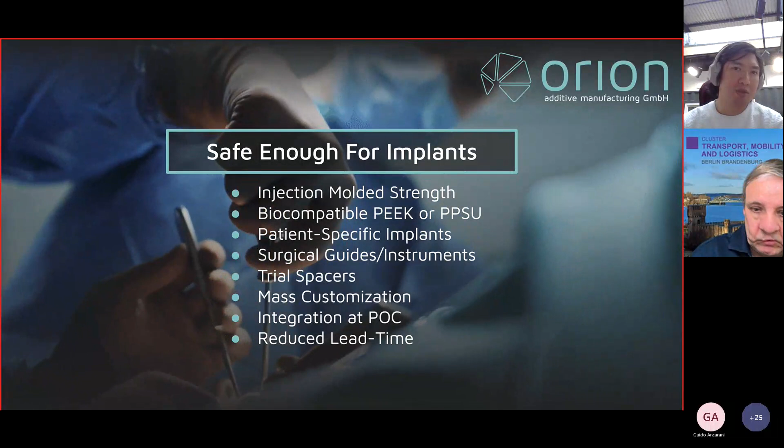When it comes to implants, we're not usually mass producing them. Something like a cranium implant is something you will make once or twice, but there's really high value in that. So I think when it comes to applications, we have to find ways to address applications where the technology is most suitable, because you don't want to take an application that's traditionally manufactured using injection molding if it just doesn't make sense. Looking at particular applications such as patient-specific implants, where there's a high amount of customization required, it makes more sense to use additive manufacturing.

Some of the applications I just mentioned are shown here. The cranium implants are probably the most beneficial case for additive manufacturing. They really highlight what the benefits of additive manufacturing can add in terms of value.

But there are also spinal cages. I mentioned earlier that when we worked with our first customer in spinal cages, we thought they were just 3 different sizes: small, medium, large, and that is what was traditionally done before. But it wasn't actually the best solution for the customer - it was just what the industry offered because it was the most cost-effective solution. The best solution for the customer is actually a patient-matched device, so it fits the patient's needs. I think this is really how we're starting to see additive manufacturing change solutions happening in the industry.

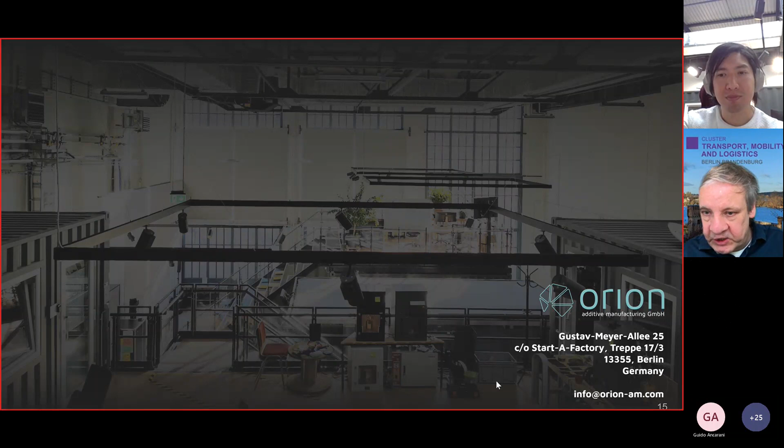Yeah, thank you very much, and well explained. So I have no questions in the chat for the moment. Well, yeah, now I have one, but I have two questions from my own.

I'm starting with this. What further potential use cases do you see for your technology in general, and with a special focus on the railway sector in the future? Yeah. So, as Stephanie also showed, I think in terms of the railway industry, the parts are normally quite large. So we started our process to validate it with a smaller footprint, just to make sure that we can achieve the type of properties that we can achieve.

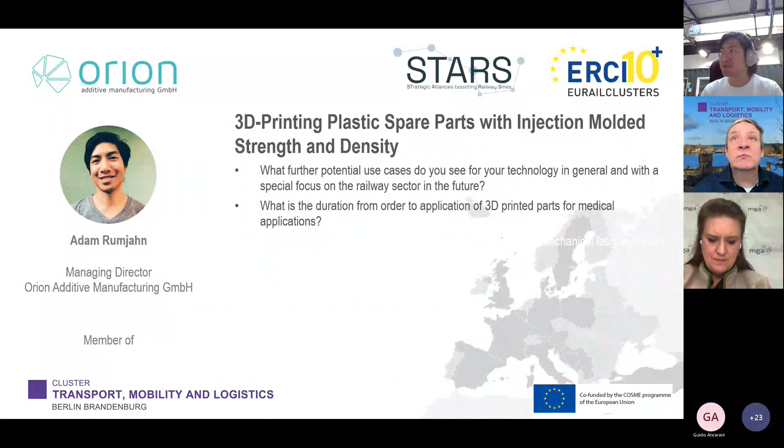But I think when it comes to addressing the railway industry, we definitely need much larger parts. So I think we're still kind of in this phase of exploring where our technology could be useful. But it definitely seems that it's more on structural plastic parts that are critical in terms of the railway industry. And I think this is something that we need to discover a little bit more on our own.

More in general, I think the more clear the application is, the more chances it will be successful, where there's a clear advantage. And I ended with medical because, I have to say, it's something that we started with, but we kind of moved away from. But then it just keeps coming back to us. Like everyone keeps coming to us and saying, can you print medical implants? Can you print it for this particular application in medical?

And we just also got a request yesterday from somebody in Ukraine who's been 3D printing implants for wounded soldiers. So there's definitely a lot of soldiers that are being wounded either on the battlefield or because of stepping on landmines, and they need an implant. But the reason why they need access to this technology is because they can't access one of the 3D printers that they had because it's in an occupied zone at the moment.

So we see additive manufacturing having an impact in many different industries. I see medical as being one of the strongest value propositions for our technology. It's a really clear application, and we also see this idea of distributed manufacturing, to basically bring the manufacturing closer to where it's needed. So I kind of see this as the future of additive manufacturing.

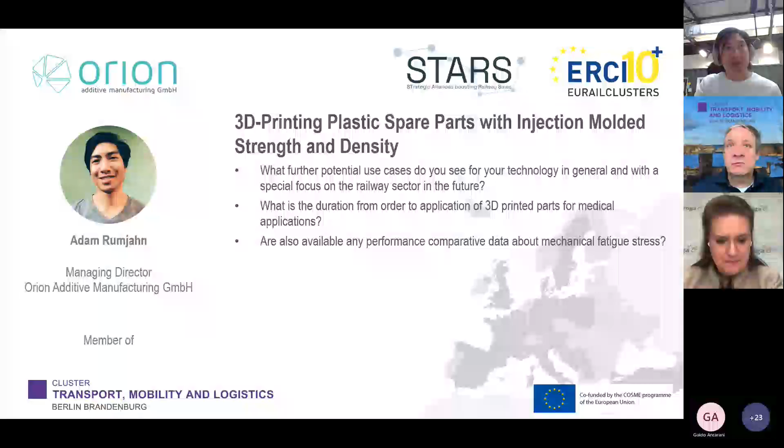But every application has a different test that is normally classified under a norm or a standard. So, for example, with cranium implants, there's an impact test, and with spinal cages, there's a slip out test. So they try to compress the spinal cage between two surfaces and then try to push it out to see how easily it pushes out. So in terms of mechanical fatigue, I think it really depends on the application. These kinds of tests would need to be addressed depending on what the application is.